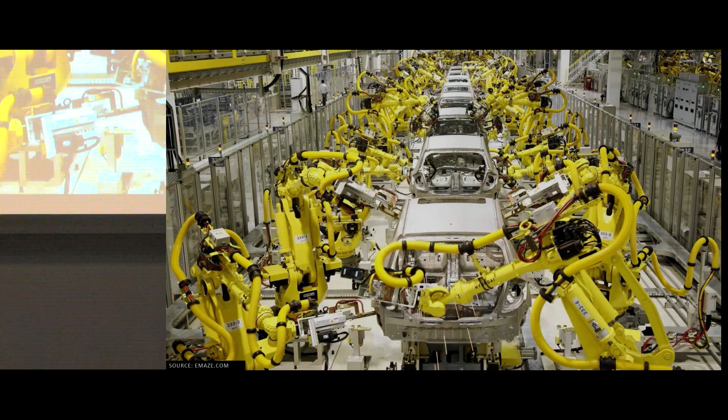So I'm excited to tell you a little bit about our thoughts, my group's thoughts, on soft robots that evolve on demand. But before I get into that, I want to start with the robot cliche. When you ask people to conjure up an image of a robot, most people think of something like this. These are rigid machines that perform a repeated task. They're very good at what they're designed to do, right? These are fast and strong and precise.

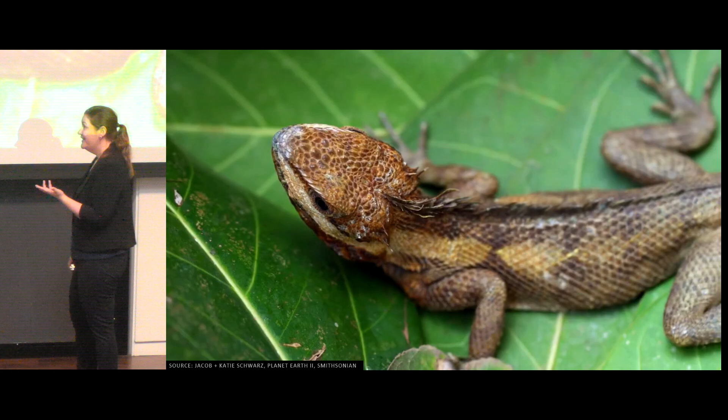But what they are not is safe for human-robot interaction. You don't see people working alongside these robots. And they're not adaptable. You don't see these robots adapting to changing tasks and environments because that's not what they've been designed to do. But when we all imagine robots for the future, I think we all imagine something more like this, like animals, like ourselves. We are incredibly adaptable, right? We readily adapt our body configuration and our behavior to different tasks and different environments.

I can easily transition from manipulation tasks to locomotion tasks. I can transition my body properties, right? I can stiffen my muscles and soften my muscles in order to perform both forceful and gentle tasks. So how do I do that? How do you do that? How do animals do that? Well, I noticed something when watching all of these videos. All of these animals look at least partially soft. So let's take a deeper dive into that observation.

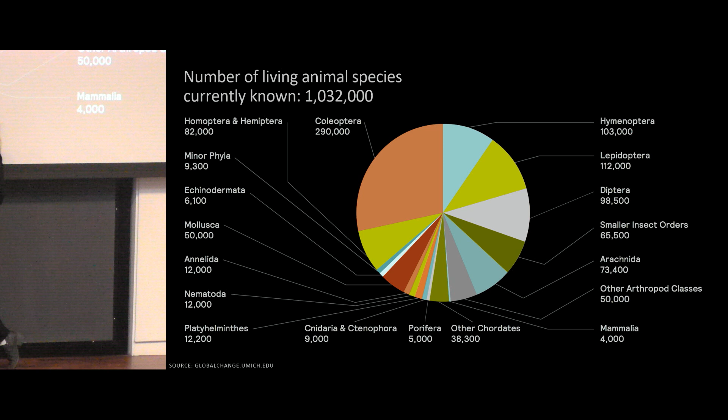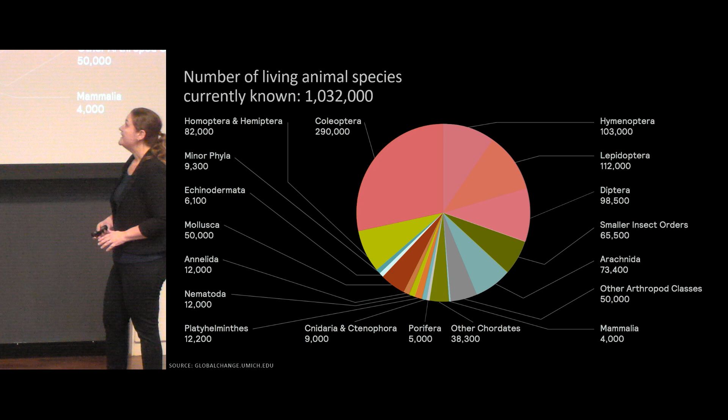Okay, here's a plot of all known animals in the world, just over 1 million at the time of this data. And just to put things into perspective, we as humans are in the mammal category, which is this tiny sliver of all known animals. And as it turns out, all known animals in the world are at least partially soft. There are no known animals that are completely rigid, which is in contrast to the way that we typically design machines and robots. And if we look at this even further, we see that over half of all known animals are completely soft, so contain no rigid elements whatsoever.

So there's certainly some things to think about when you're thinking about completely soft animals. You can think about jellyfish that live in the water or worms that live in the ground. They need to be supported by their environment. We as humans are a fairly large animal that lives on the ground. We require some rigidity, our skeletal structure, to keep us standing up. But as a case study, humans on average are only 15% bone skeletal structure and 85% soft and fluid materials.

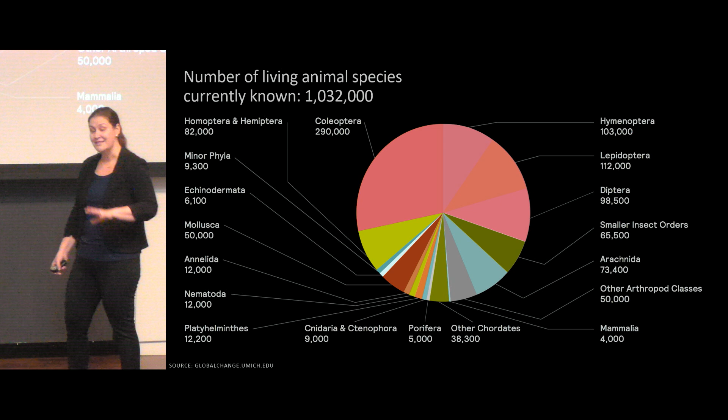So when I first heard this, I thought, wow, there has got to be something to that. Is it possible that our soft material composition plays a role in our ability to interact with and adapt to our environment? And if so, could soft robotic technologies be part of the solution to the adaptability problem for robots? So I am by no means the first or the only person to start thinking about these questions, thinking about soft robotics in this context for adaptation.

And soft robotics is a rapidly growing field that has lots of other benefits potentially outside of adaptation. Lots of pioneers have been looking at these technologies for potential adaptation, but also other potential benefits. So I want to showcase some of these benefits here. So in the first video that you can see on your left, there's a soft robot that's walking out into the street. It's a locomotion system. It gets run over by a car. It's able to continue locomoting despite this impact owing to its soft material composition that's absorbing those forces.

In the middle, you can see a soft pneumatic gripper. It's able to grasp diverse and delicate objects, owing to that soft material conforming around the objects. And on your right, you can see a wearable system, a wearable robot that could potentially augment load capacity for the wearer or increase efficiency of motions for the wearer while conforming around their body, the soft material conforming without restricting the natural mechanics of motion of the wearer.

However, all of these robots are task specific. So we talked about locomotion and manipulation and wearability. They're designed for a specific use case, and they would not perform well for any application outside of that intended use case. So the locomotion system, for example, would not perform well in a manipulation context. So the grasping robot would not perform well in a locomotion context, and so on.

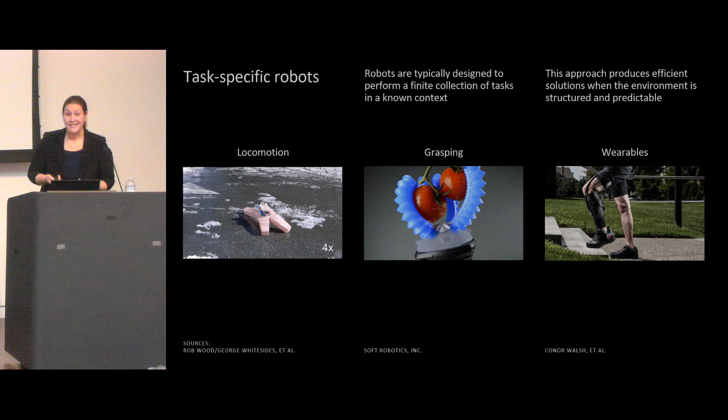And so my question is this: can we design more adaptive robots? Can we use these emerging soft robotic technologies to build robots that can adapt in their morphology and property and behavioral control policies to changing tasks and environments the way we do? So this is a central question that I've been asking for a long time. That kind of is the focal point of my research group and my research program.

And we come at this from the perspective of materials and thinking about soft robots not necessarily as mechanical assemblies, as assemblies of discrete components of sensors, actuators, structures, controllers, and putting those together, but rather as multifunctional material systems. And so one of our core competencies is we're really good at emulsifying things. We can take responsive materials and break them down into discrete components where we can then use them for different manufacturing processes. So you can imagine particle concentrations at high concentrations being used for printable slurries and at low concentrations being used for more drop-on-demand style printing.

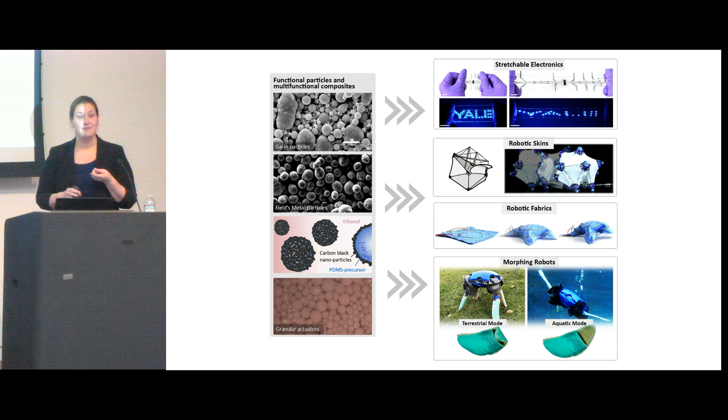Or we can also mix these functional particulates into other functional materials in order to create multifunctional composites, and then use all of these new manufacturing processes and multifunctional materials in emerging soft robot platforms with an eye towards adaptive morphology and behavioral control policy for changing tasks and environments. So here's just a few of the robot platforms that we've been thinking about recently. And I'd love to tell you about all of them, but I don't want to keep you here for so many hours. So we've now reached the adaptive part of the talk.

I have prepared modules on each of these 4 topics. And historically, I only have time to talk about 2 without keeping you too long. So I'm going to let you vote on what you would like to hear. You choose your 2 topics, and then we'll dive in. So I'll give you a little bit of a snippet of each of the topics so that you know what you're voting on, and then we'll get to a voting process.

So the stretchable electronics module is about liquid metals. It's using eutectic gallium indium and gallium indium alloys that we initially started looking at for sensors for soft robots, but then kind of inadvertently discovered a formulation that has a very suppressed strain response. And so we use this strain insensitive formulation in order to port traditional electronics and computational circuits into soft stretchable forms.

Robotic skins is one of the oldest topics on this list. It looks at planar elastic membranes with embedded actuation and sensing that we can wrap around inert deformable objects in order to turn them into robots from the surface. Robotic fabrics, again, looks at planar surfaces, but fiber-based, where we're looking to create functional fibers that serve as actuators, variable stiffness materials, and sensors, while retaining the native fiber architecture and mechanical properties of the fabric.

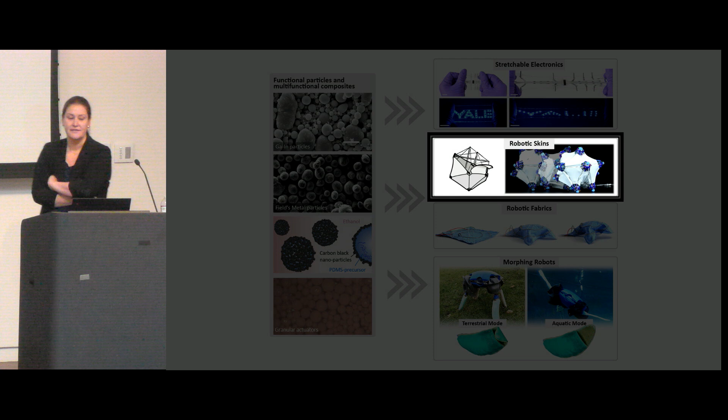And so I had an idea, and this is the idea that I pitched. Robotic skins. What if we could turn skin-like membranes into robots? If we could make these elastic planar membranes with embedded sensors and actuators and computation structures, all of the things that we need, but within this stretchable membrane that can be wrapped around inert deformable bodies and turn things into robots from the surface on the fly.

So in this case, there's a kind of simple schematic of a potential robotic skin. We have actuation layers, which are drawn as lines. Those are meant to be linear contracting actuators. We have different sensory layers that might be sensitive to strain in certain directions or pressures. And then we can put those all together, wrap them around some soft body. So in this case, it's meant to be a balloon.

So we wrap a robotic skin around a balloon, and if we wrap it so that the actuators are radially wrapped around the balloon, and then we sequentially contract those actuators, we get something that looks like peristalsis. And we could take this balloon and put it on the ground, and it might look like it's performing peristaltic locomotion.

Now we can take this robotic skin off, so we can remove it from the balloon, reorient it 90 degrees, and reattach it. Now those linear contracting actuators are along the length of the balloon rather than wrapped around radially. And so when we sequentially contract them, now they'll bend the balloon. And so you could see this kind of bending motion. You can imagine if you take this robot and put it on the ground, that you might see something that resembles inchworm style locomotion.

And so you can start to think about how you could use robotic skins and skin-based control in order to create robots on the fly that have different motions, different modalities of motion, and different types of locomotion, perhaps, for various terrains and locomotion robots. Okay, so I wrote up a proposal. It was actually the first proposal I ever wrote to NASA. They reviewed it, they said yes, and off we went. So this was one of our first projects.

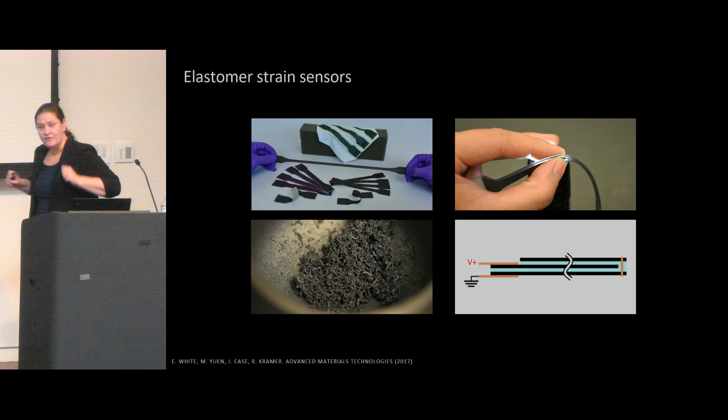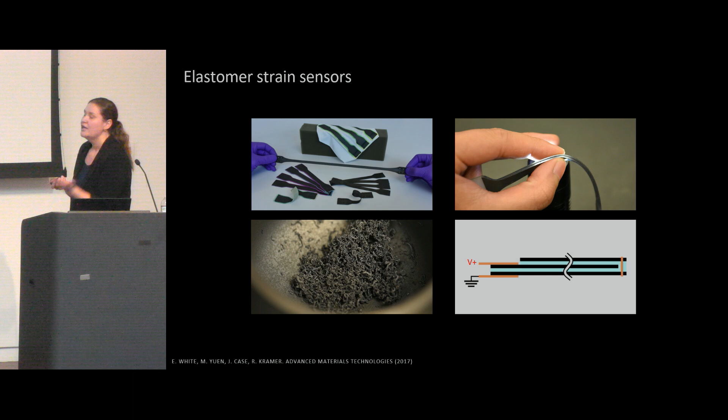And then we can take these flakes and mix it into a pre-cure polymer, and we can rod coat it, make films of it, and cut out these capacitive sensors. So you could use a 3-layer sensor. We make a 5-layer sensor. We just add another dielectric and electrode layer in order to protect the sensor from noise.

Okay, so let's look at how these sensors perform. So we have a nice linear response. This is one of the benefits of capacitive sensing and stretchable capacitive sensing. Our capacitance response to strain is typically very linear. We have an expected nonlinear mechanical response to strain. It's a fully elastomer layup, so that's highly expected.

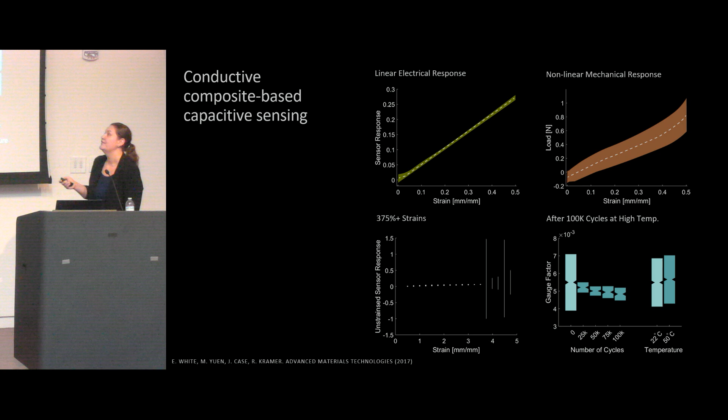Our sensors, this particular one, operates up until about 375% strain, sometimes higher. So we think it's very accommodatable to the types of soft robots and types of strains that we would be experiencing. And we also looked at drift over hundreds of thousands of cycles. So we cycled our sensors to 100% strain for 100,000 cycles, and we saw very little drift in the gauge factor, which is a measure of the sensitivity of the sensor.

And working alongside NASA, they also encouraged us to look at temperature variations, environmental variations overall. And so we did look at some slight temperature sweeps between close to room temperature and a little bit warmer, and again, saw a lot of stability in the gauge factor or the sensitivity of the sensors.

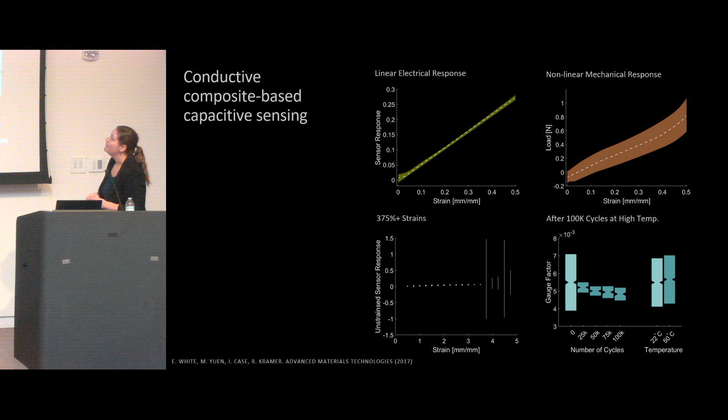So I will say before moving on that we have developed these sensors quite a bit further since this initial design. In addition to the graphite flakes, we've added in liquid metal particulates. So we've made it a multi-phase composite. And this actually evens out the thermal conductivity throughout the electrode. The electrical conductivity and the percolation is much more uniform throughout the electrode. And so this has increased our linearity of response, especially at very high strains, quite a bit. So that's just some more recent work that we've been doing with this.

Okay, so with confidence in our sensors, we can now put them together with actuators and start to realize the robotic skin concept. So here are just a few of the initial prototypes that we made. So it's really important to think about robotic skins not as a specific embodiment. So it's not a specific substrate material, a specific layout of components, specific actuator choice or sensor choice. It is an elastic membrane with embedded actuators and sensors.

Stand by the podium, sorry, I feel like I'm wandering.

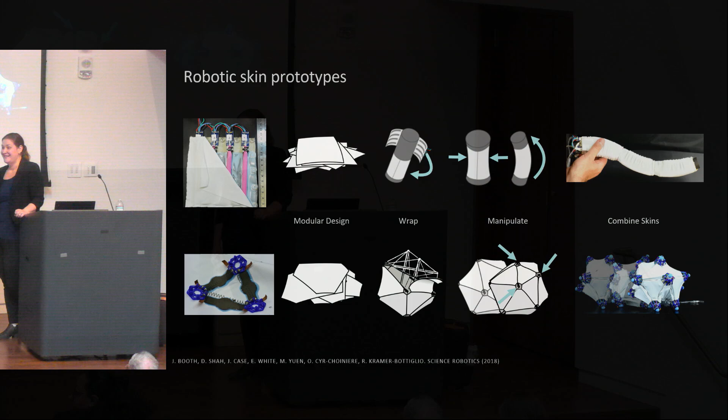Other questions? Great questions, guys.

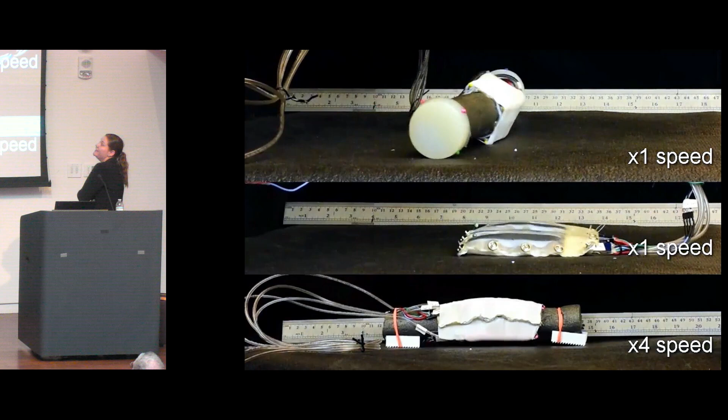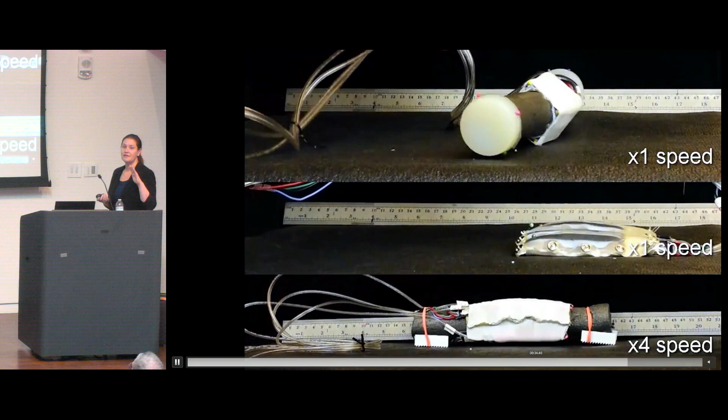So we take the robotic skins off, and then we can put them on 3 other bodies in order to achieve a different task performance, locomotion performance. So here, let me see if I can go back a little bit and replay this part. So one robotic skin is wrapped around this cylinder foam. Remember, these are planar configuration of components. So we are confined to single curvature bodies.

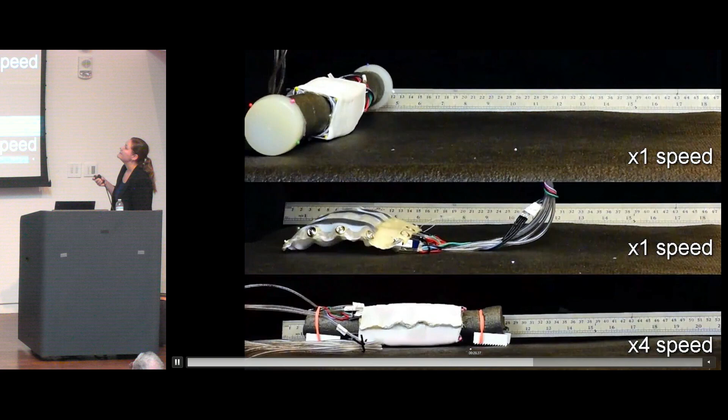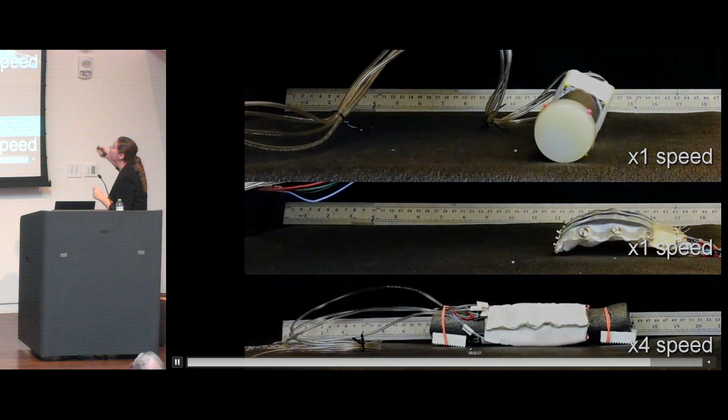And let's see. Yes, so in this case, we have these weighted end caps. So those of you who work with elastomers might remember we mix in cups. You pour part A and part B into a cup, and then you use it, and you have this stuff at the bottom that just kind of cures there. And we just took those out of the cups and pinned them on to the ends, and we made these weighted end caps for this grab and pull style of locomotion. Move it forward just a tiny bit more.

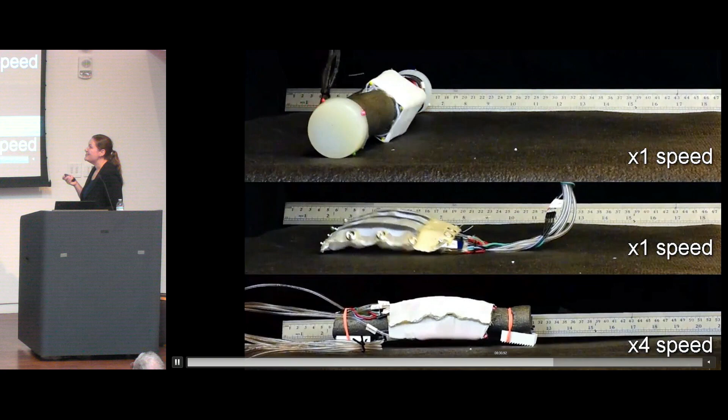And then in the middle, we have a bodiless one. So this is not attached to a separate soft body. This is a skin just locomoting on its own, but I like your idea of attaching multiple skins together. We will definitely look at that in the future. And then here we have a more inchworm style of locomotion. We've just used rubber bands in order to, sorry.

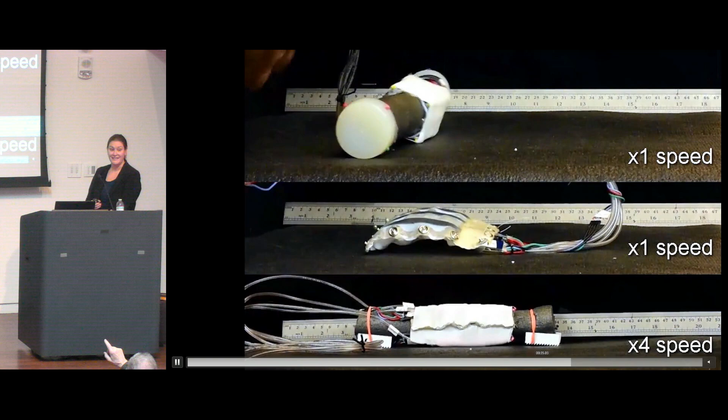I had a question about the middle one. Yes. How does it know to go right? Is it guided by the wires? Because when it contracts and extends, it doesn't know whether it should go left or right. You know what I mean? Yes. So the wires are doing something.

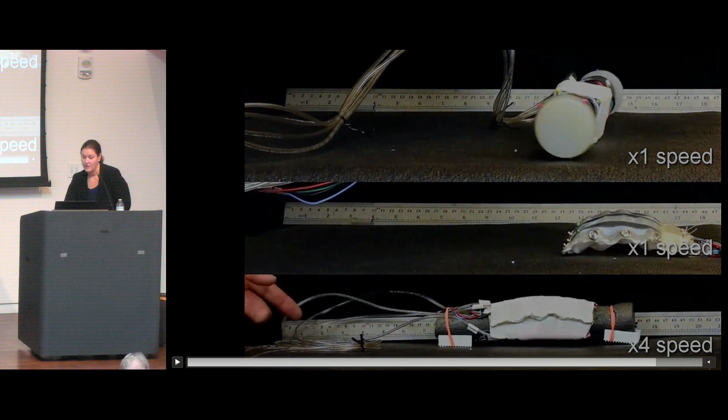You're right. I think, so in many cases with tethered systems, the locomotion function is heavily affected by the wires. And you're right, there's a lot of tethering going on here. We have tubing for the pneumatics. We have wiring in order to deliver power to our transducing circuits, our capacitive circuits. So there's a lot of tethering going on here, and power is off board. So there certainly can be some influence from the wiring. We haven't untethered these systems yet.

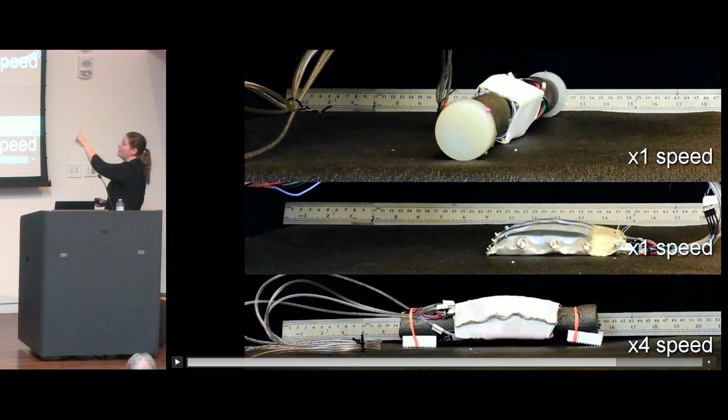I will say, I don't have a video of this particular one, but we did a demonstration where we put a light sensor on a robot that looks most similar to this one. So this one we just have the rubber bands and the laser cut. It's just a piece of plastic that's been cut to have biased feet so that it will move in a biased direction during inchworming.

And we attached the light sensor just to the front of it and then used a flashlight. We just told it to very simply follow the light. And then we moved a flashlight around and it followed the light. And it was also tethered, but it was able to make fairly, I'll call them agile turns and follow the light pretty well. So we know that there is some control that is beyond the tether. Did that answer your question?

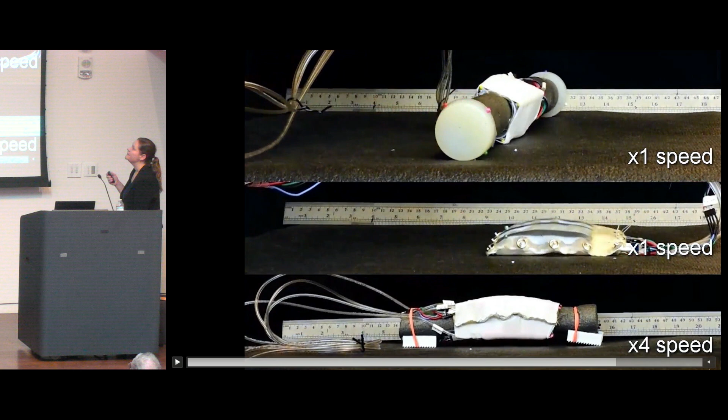Okay, great. So the final thing I want to point out on this slide is that all of these demonstrations are intentionally very hacky, right? So like I said, we just took out the pieces of elastomer that had been cured in the bottoms of cups and used pins to put them on, and we use rubber bands here. And that is all in line with the robotic skin concept.

We wanted to deliver something to NASA that they would be able to just grab whatever they had available, in situ material, crumpled pieces of paper, rubber bands on board, and that people would be able to build robots for different types of locomotion or different types of manipulation performances or grippers, just using whatever they had. So that's why we very intentionally made these out of readily available materials.

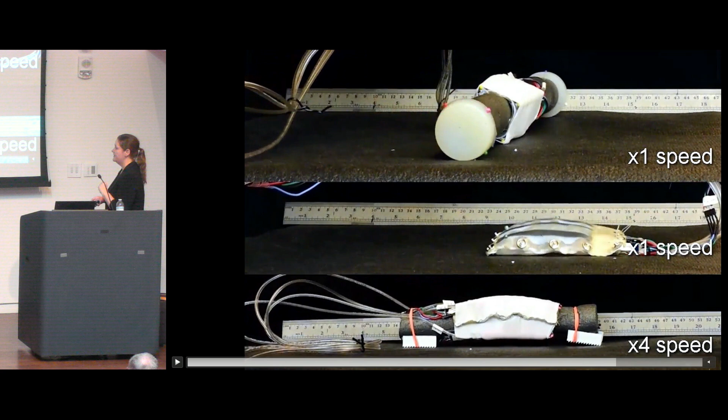Okay, so now we can return to our 3-segment continuum arm and turn it into something that looks a little bit more like a gripper. So in this case, we have two plastic plates, and we've taken one of our robotic skins, and we simply contract it between the plates so that it grabs an object, moves it to a desired location. Here we took that one gripper off and added another gripper.

So it's the same 3-segment continuum arm here, but here we have an active finger and a passive finger, and this is just made out of cardboard. And again, we just grab an object, move it to a desired location. So this shows how we can use the same exact skins across a manipulation platform, a gripping platform, and a locomotion platform, or several locomotion platforms. Okay, and now we can look at our triangular skins. So I talked about this a little bit before.

Yeah. Did you, this might go to Christine's point, did you ever try wrapping it in a kind of angular way so you could cause it to twist? Yes. Oh, we actually just published a paper on this. I had a student that looked at angles of actuators and looking at torsion. The modeling became slightly more complicated.

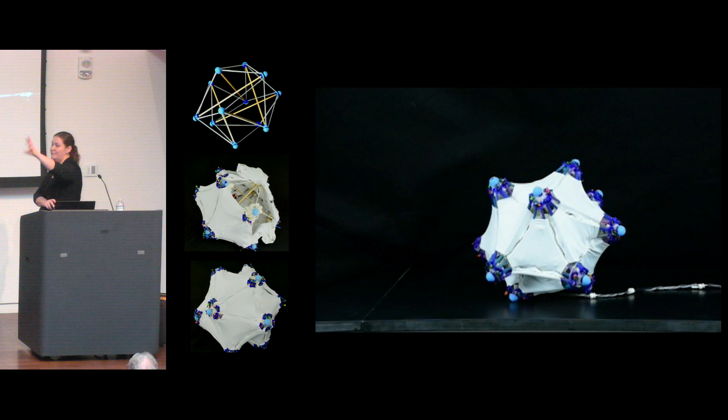We had to relax some assumptions in our initial models about constant curvature. Yeah, exactly. In order to couple constant curvature assumptions to torsion. But yes, we've started looking into it. It is possible. It's a little bit more challenging for us to do predictive modeling on placement of the end effector, but efficacious nonetheless. Great question.

All right, so here are the triangular skins with the triangulation of components. We decided to put them on a 6-bar tensegrity. This was largely influenced by our collaboration with NASA. So we were working alongside them on this project, having tight collaborations with NASA Ames in particular. And at the time, they were really active in a project called SuperBallBot. Maybe some of you have heard of it. It was a robotic 6-bar tensegrity.

So they had a structure that looked like this, except it was very large. I'll say this tensegrity that you're seeing in this video is desktop scale. It's about this big. SuperBallBot, the one they built at NASA, is about my height. It is massive. And it is fully robotic. So they change the lengths between the cables that suspend these rods in order to create punctuated locomotion. So we were very inspired by them and working alongside them.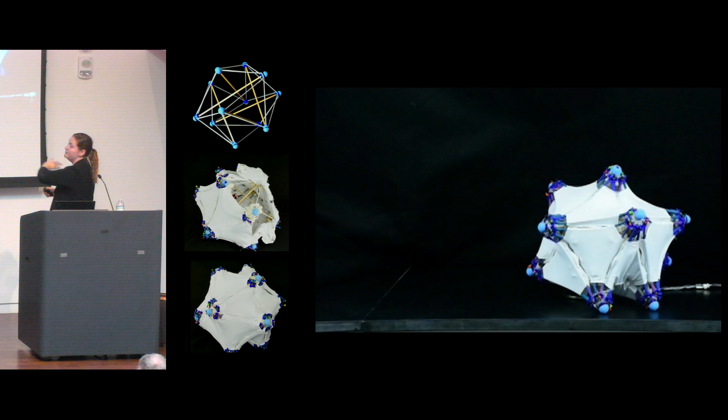We took a fully passive 6-bar tensegrity. So there's nothing robotic about this one. And we took 20 of our robotic skins, patterned them around the surface, and then actuated it, achieving the same kind of punctuated rolling locomotion, but actuated entirely from the surface. All right, so then we can take these skins off and use them in a totally different context.

So here we've placed them on the back of one of my former postdocs. This is Joran Booth, and he's doing a great job here. So we've just used double-sided tape in order to attach the robotic skins to his back. And we've aligned the sensors along his spine, and we've programmed them so that once they stretch beyond a threshold, as he's slouching, the sensors will stretch. Yes, question. This is very interesting. I have a question about the tensegrity.

When you change the length of the cables, how do you maintain stability? Can you make some comments about the stability of the system? Yeah, so from a robotic tensegrity standpoint, there's a really large amount of literature on robotic tensegrities, and I don't want to try to represent all of it. People have used really different technologies towards this.

But I would say the most common approach, this is the most common morphology, a 6-bar tensegrity. We're actually working on a 3-bar tensegrity, but it has a different morphology than this. I think the symmetry of the 6-bar makes it really appealing. And so most of these are actuated through a winch and cable mechanism. They're usually larger in order to actually accommodate that hardware.

And so tensegrity is tensile integrity. Sorry if I wasn't clear about that initially. It means that there are rods that are suspended away from, so none of the rods are in contact with one another. They're suspended away from one another and in equilibrium via cables in tension. And so those cables are what's connected to the winch and cable mechanism.

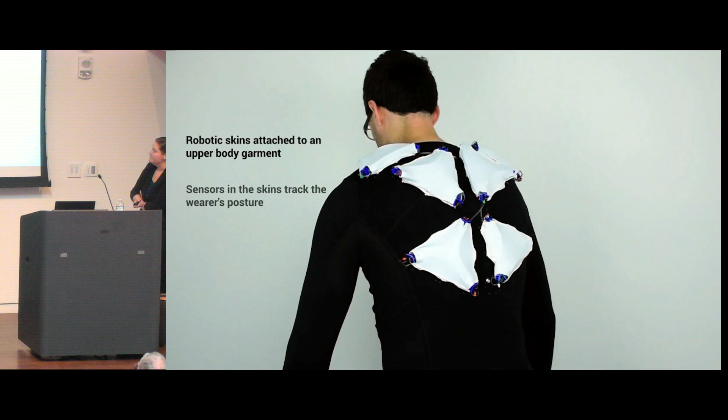Wonderful. Okay, so let's look at wearables again. All right, so here, Dr. Booth has our robotic skins attached to his back with double-sided tape. We've programmed the sensors to communicate with the actuators. So once they stretch beyond a threshold, so he slouches, it stretches the sensors. The sensors go beyond some threshold that we've set, and you'll see in the data that's about to pop up over here. There it is.

Okay, so there's our sensor data, and whenever he slouches, it goes into this stretch position, and that communicates to the actuators that they should start pulsing. So the actuators, you can see they pulse to communicate with Joran that he should sit back up. So I'm commonly asked whether these actuators are actually corrective of the posture, and they are not.

But I will say, if you come to my lab, please ask for this demo. It kind of feels like a massage. I think it's very pleasant. Might actually encourage slouching a little bit, but I don't know. Come and try it and let us know. Great.

Okay. So hopefully I've been able to convey to you this kind of vision that we have of modular soft robotic skins that we can have in different layouts and they can accommodate different curvatures of bodies, but we can mix and match them and apply them to different soft-bodied materials in order to create robots on the fly. So we can apply them to these long tubes of foam and different types of gripping mechanisms in order to create manipulation platforms.

This is the one I didn't show you a video of, but you can see the light sensor that we put on the front of it. That's the image of the light sensor. And so we can control it a little bit. We can put them on things like these 6-bar tensegrities to create rolling locomotion robots, and then take those exact same skins off and put them on a person, create a wearable system. And so the whole idea is to be able to use and reuse the robotic skins to be able to complete different tasks.

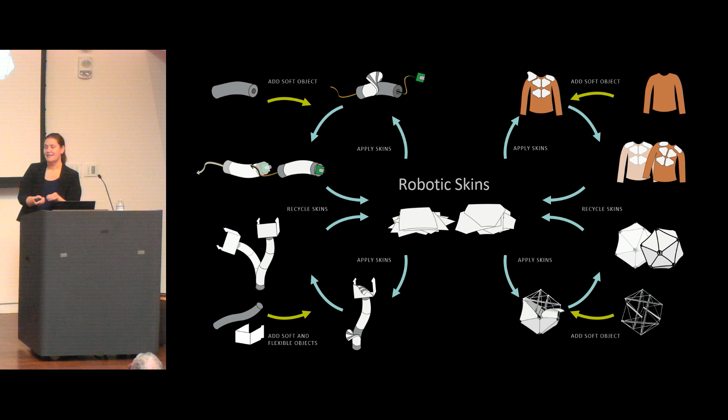So moving on, as we got to this point in the work, one of the things that we struggled with was the human handler part of it. So all of the videos that you saw require a person to actually come in and position the skin, attach the skin, remove the skin, put it on something else. So there's definitely a person in the loop here that's making a lot of decisions and doing the design. And we were thinking about autonomy in terms of variable morphology and variable task performance without a human handler.

So I had this really fantastic phone call with Josh Bongard. He's at UVM. This was years ago, where we were talking about robotic skins. And he had this idea to wrap them around plastically deformable materials. He said, you can wrap them around clay. Can we use robotic skins wrapped around clay and sculpt materials from the surface? I said, wow, that's a great idea. And so we started jumping into that a little bit. So this overall concept of wrapping robotic skins around, say, a sphere of clay, any plastically deformable or clay-like material that can be molded from the surface, applying surface strains and pressures.

And kind of just like a sculptor would take a block of clay or a ball of clay, be able to apply surface strains entirely from the surface and mold it into any morphology. And we wondered, can we do that with robotic skins? You can imagine robotic skins molding the underlying body into something that might be rolling locomotion and then elongate into something more snake-like, cylindrical-like, that can slither, or inchworm, or undulate, and then maybe even grow appendages into something that looks like a quadruped. It can navigate maybe sandier surfaces.

So we did a little bit of preliminary work toward this idea. This was one of our only instantiations that also used layered skins. That was a question from earlier: can we layer the skins on top of one another? So in this particular demonstration, we have a clay-like material. This is actually Model Magic. Maybe some of you have used it. It's not a technical clay, but it is clay-like in that it's a moldable material. And it's the white center that you see. So the white center is this Model Magic cylinder, and we've wrapped it in 2 robotic skins.

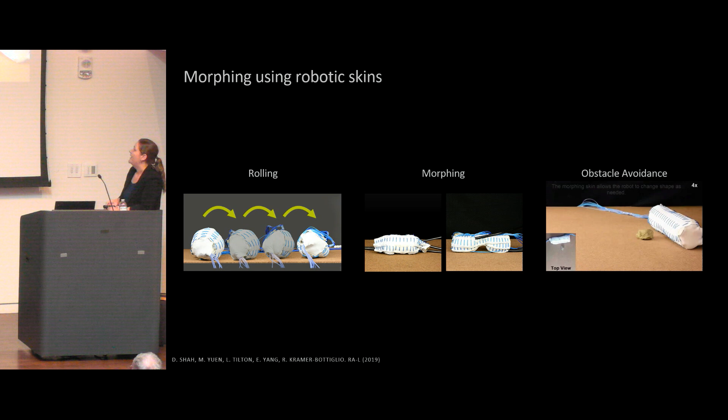So this is a very low level demonstration, but to me it shows potential. We're very interested in using this potential of robotic skins wrapped around clay-like materials to adapt the morphology using these other approaches that would be complementary to traditional path planning and gait transitions.

Okay, and then as a final thought in this part of the talk, still working alongside NASA, this is an active funded project that we're working on right now. We thought, okay, well, if we're gonna be using clay inside the robot anyway, why not use in situ material? We're gonna go to extraterrestrial environments where we know there are clay and sand deposits. Maybe we can use those things. We don't have to transport them. Again, reducing weight and volume during transport, use what's there. So we could take these robotic skins and deploy them as kind of parachutes that deploy very safely into the environment, and they can be transported flat, really low volume, really lightweight. And then once they get there, potentially stiffen their leading edges.

And I imagine these robotic skins being able to burrow into the ground and scoop up their own bodies, using in situ materials to create their own bodies, envelope around that material, and then perform tasks just as we saw in the previous slide. So this is something that we're working on right now. We're doing a lot of work towards variable stiffness materials in these leading edges and also studying burrowing, which is a new project for us. We're learning a lot about penetration forces through different granular media. And we're having a lot of fun with this.

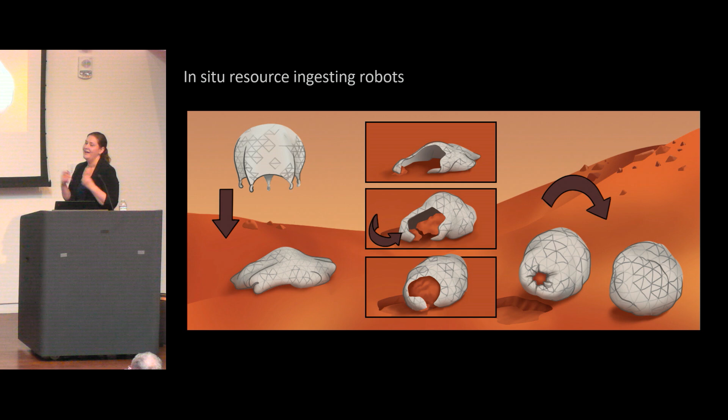Okay, so with that, I will move on to your second voted topic, morphing robots. So this is a project that we started working on with ONR about 7-8 years ago. And it again started with a very specific challenge. ONR was interested in amphibious locomotion, efficient multi-environment locomotion. And so we started thinking about amphibious robots and how they currently do this. And what we learned is that amphibious robots typically fall into one of two categories. So usually you have an amphibious robot with a dominant propulsion system, one that is really efficacious in one environment.

So say it has a propulsion system that's largely optimized for land locomotion, and then can operate in water, but it's less efficient in the water environment. So it can be amphibious, but it has a dominant environment where it's more efficient in one environment.

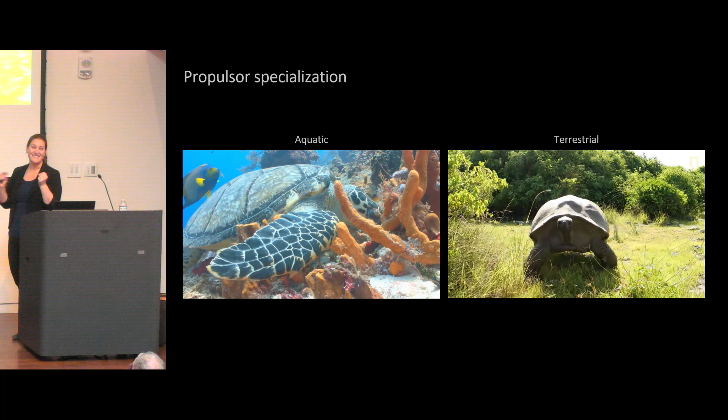Or the second category is amphibious robots with two dedicated propulsion systems, one for water, one for land, and then the robot will retract and deploy whatever propulsion system it needs based on the environment that it's in. But this means that it's always carrying around a propulsion system payload. It's always carrying around one system that it's not using, and we thought that that might negatively impact the energetics of locomotion in each environment.

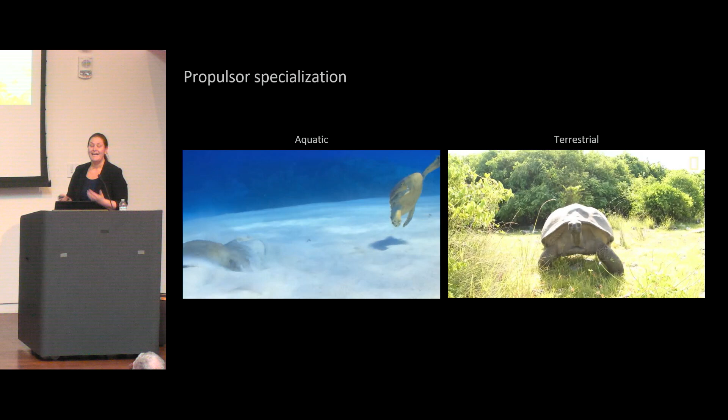And so we had this idea to create a unified propulsion system, a single propulsion system that leverages soft robotic technologies to morph the propulsor to be specialized in each environment. But this way it's not carrying around a separate propulsion system, it's using the same one, and it should be efficient in both environments. And so as I've been explaining this, you've been watching these two videos, so it will come as no surprise to you that we were very inspired by these two species.

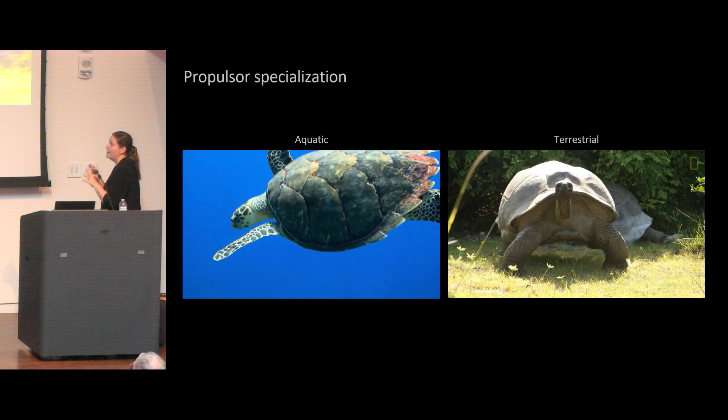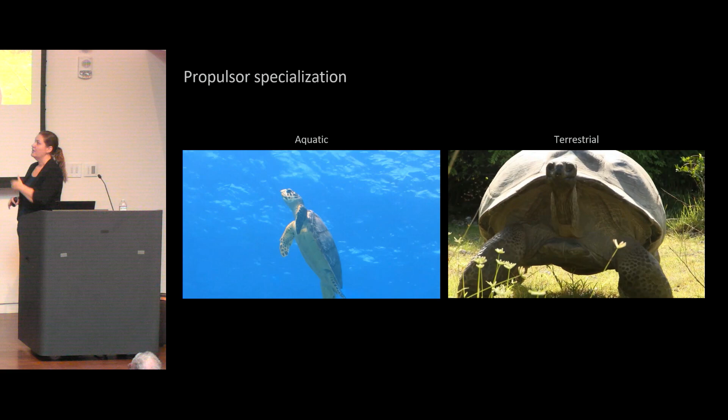We surveyed land locomotors and water locomotors, and we identified sea turtles and land tortoises because they are morphologically very similar, right? Both are quadrupeds, both have a central shell, hull, carapace, and they differ primarily in their limbs. Sea turtles have these flattened, elongated, flexible flippers that are very specialized for locomotion in water. Land tortoises have rounded, load-bearing legs that are very specialized for walking on land.

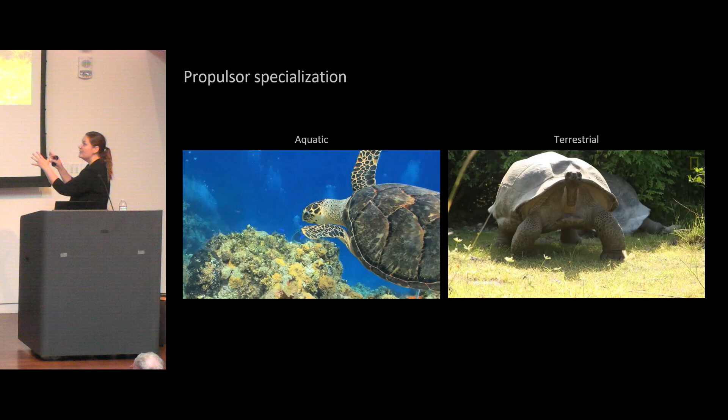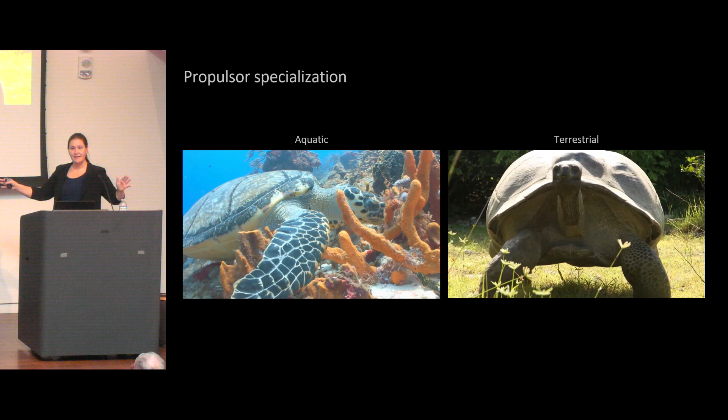And with this inspiration, we thought, okay, we can build a single robot that has an immutable shell at the center, more traditional robot center, and really only morphs its propulsors, its limbs, between flippers and legs in order to achieve this efficient multi-environment locomotion. So this is exactly what we did. We created this robot that we call the amphibious robotic turtle, or ART for short. It is sea turtle and land tortoise inspired, and it has these morphing limbs.

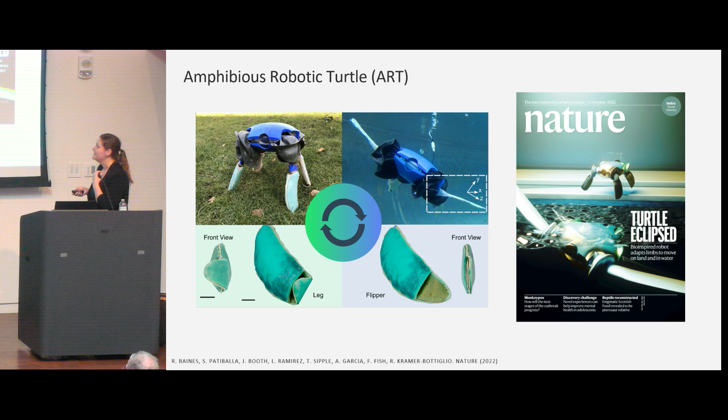So the center of the robot, this 3D printed shell, which I'll talk about more in a moment, has all of the traditional robotic components housed in there and protected in there. And we have soft robotic limbs, which are variable stiffness materials and soft actuators coupled along the length of the limb that transition between flipper and leg configurations. So I'll go into a bit more detail about how all of these different components work.

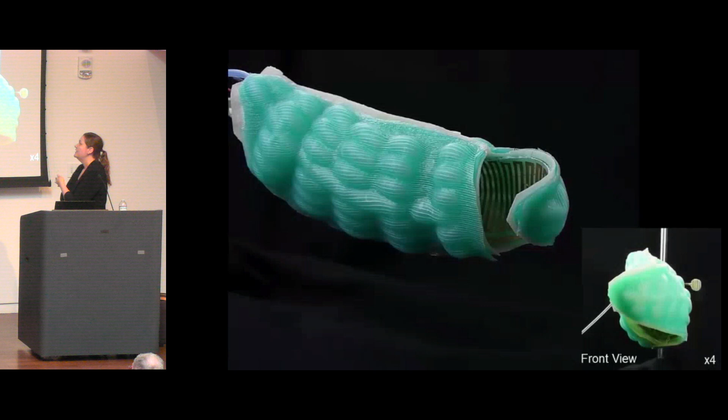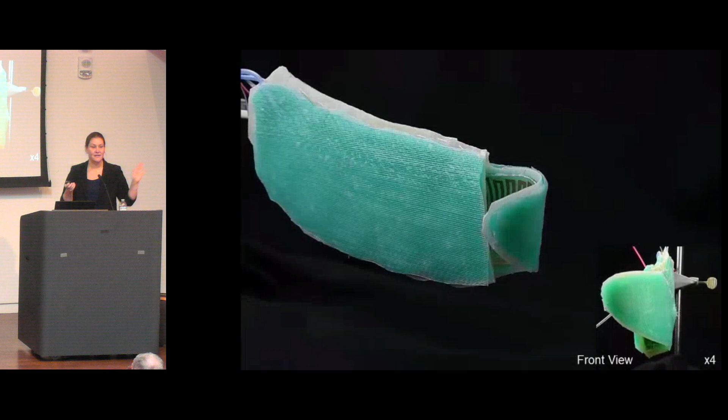So here's our first iteration of the morphing limb. It's initially in flipper configuration. That's how we manufacture it. It's made of pneumatic actuators in elastomer. So there's 3 pneumatic actuators on this limb. There's one on the outside here, one on the back that you can't quite see, and then one in the tip that folds under. So that's the tip of the flipper. And as it folds under, that creates the foot of the leg. So that's what comes into contact with the ground in leg shape.

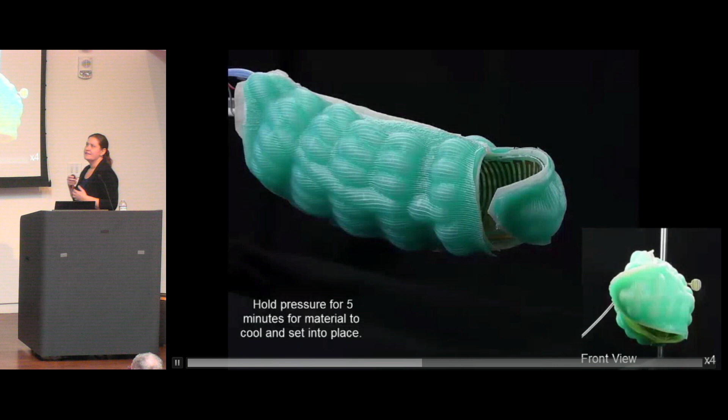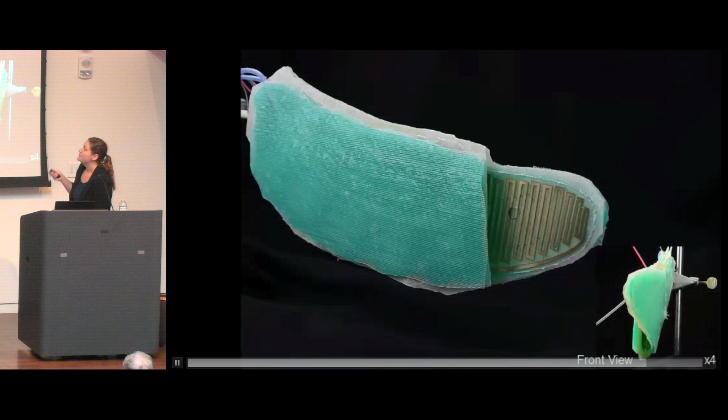And then we use a thermoset epoxy as our variable stiffness material. That's the clear material that you can see kind of going into the limb here. It's a thermoset epoxy. It has a glass transition temperature, and it decreases by about an order of magnitude in stiffness when we warm it above that glass transition temperature. And the way we warm it is using this co-located heater. So you can see a laser cut copper heater that's embedded within that thermoset epoxy.

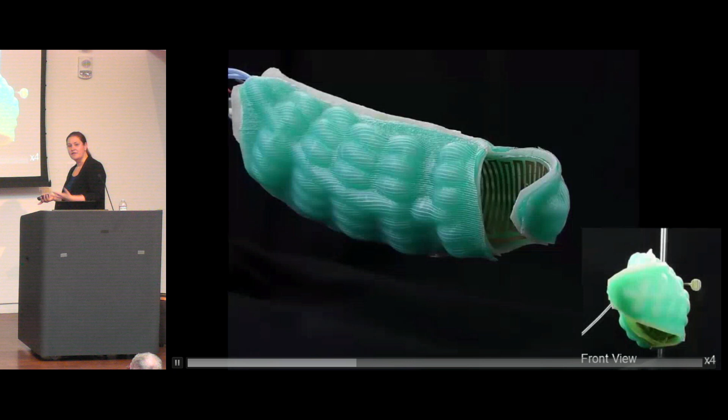And so we simply apply current, joule heat the heater, it warms the epoxy, softens the limb, and then we can use our actuators in order to move it into the leg shape. We cool the whole system down so it holds the leg shape passively. And then when we want to go back to flipper, we simply apply current again, warm the limb, soften it, and it can use its stored elastic energy in order to return into its neutral flipper configuration.

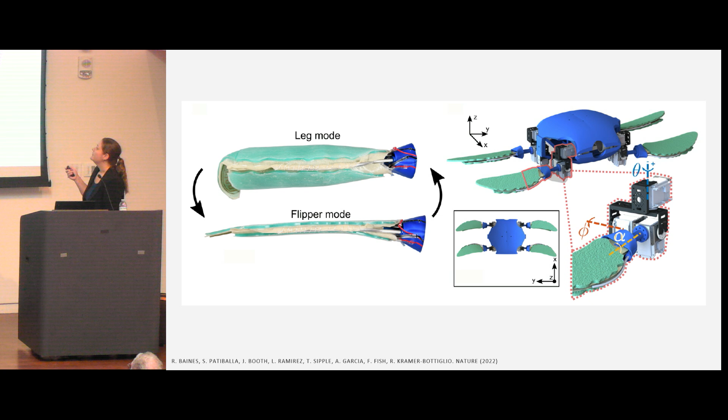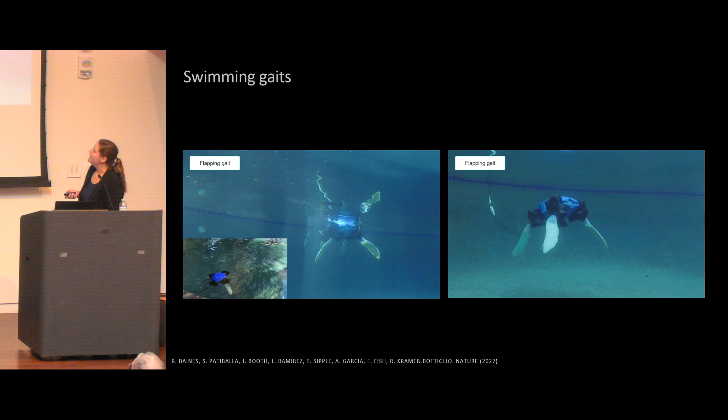And then the way that we attach these flippers or legs, limbs to the robot, you can see that here. We have a 3D printed shell in the middle. We have all of our control systems, power supply, everything we need housed in the center of the robot. And then each joint is made of 3 Dynamixels, 3 servo motors that create a 3 degree of freedom joint at each shoulder. All right, so let's check out the robot in some respective environments. So here we have the robot swimming in a backyard pool.

This is actually my dean's backyard pool. Yeah, so we were collecting this data in the summer of 2020, which we all remember. So we lost access to the Yale pool. The Yale pool was closed, and we were having a really hard time gaining access to any kind of public pools that we could do testing in. We were doing some testing over the summer at a pool club locally, but then it closed for the season.

And then you can see in some of these videos that there's leaves floating. Yeah, there you go. You can see the leaves floating at the top of the pool here. So we were pretty desperate to continue testing, and our dean very kindly kept his pool open late in the season, just to accommodate our testing. But it tells you a little bit about how cold it was, seeing those leaves floating up there.

Nonetheless, we are swimming. So here the robot has its limbs in flipper state. It's using flapping gaits. These are lift-based propulsion gaits. We also did some paddling gaits, but I don't show them here because they don't look quite as beautiful. The robot is doing some basic maneuvers. It's swimming forward, it's diving, it's surfacing.

A couple things to note about the gaits. These are real sea turtle inspired gaits. They're hand programmed by our biologist collaborator, Frank Fish at West Chester University. So he came out and actually took a flipper and would move it into the correct gait. And then we would smooth that data and kinematically copy it to the other side. Those are the gaits that you see here. So they're non-optimized gaits.

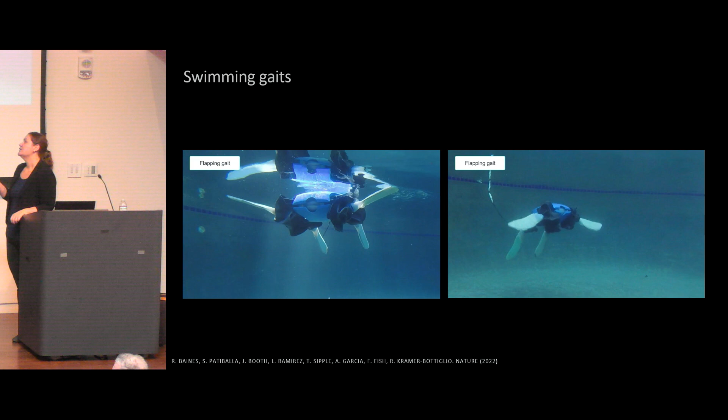No, so these are really just trailing behind. We're not doing anything with the hind flippers in these videos. Now, with our newer iteration of the robot, we're doing gait optimization that utilizes the hind flippers, but in these videos, we're not doing any kind of rudder control with them.

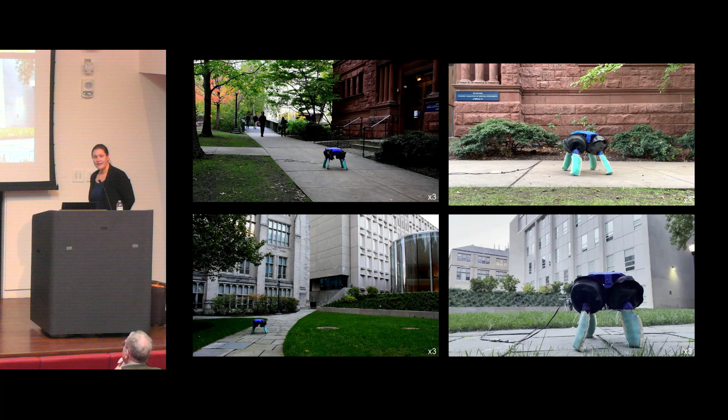Yeah. All right, so then we can pull the robot out of the water and morph the limbs from flipper mode into leg mode and take a walk around Yale's campus. So here, the robot is walking right outside of my lab and other places on campus. This is using an upright creeping gait. So this is a quasi-static gait. It's very stable. It means that 3 legs are always in contact with the ground to form a stable tripod while one leg sweeps out to take a step.

One thing to note, again, these are not optimized gaits, they're hand-designed gaits, and the robot's always walking on these rigid surfaces. So you see it's walking on sidewalk and on stone here. This upright creeping gait was very unstable on less stable terrains. So it wasn't stable on grass, for example, or sand, which you can imagine would be a problem if we're trying to transition from land to water environments.

So we did program in a third gait. This is our crawling gait inspired by the way female sea turtles actually crawl down the beach after they've nested. They're getting back into the water. So here, ART has its belly in contact with the ground. We're still in leg mode.

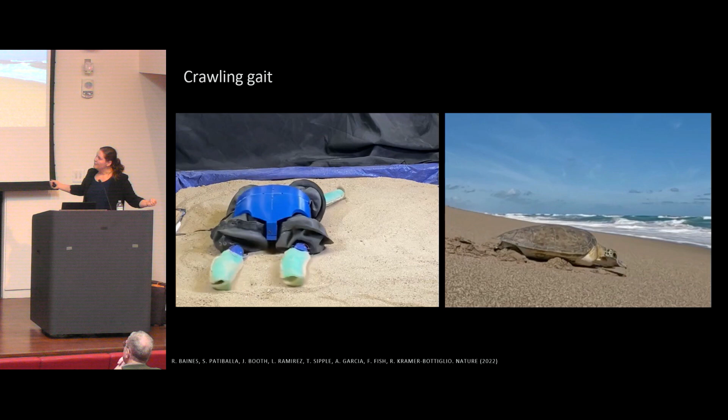Our thermoset epoxy is fairly brittle. And so if we put too much force on it, especially in flipper mode, we get cracking. So we left it in leg mode here so we can withstand the forces a little bit better as our robot does an ever so slight push-up and pulls its body forward. And something to note about this video is that I actually took this video myself.

So I was really fortunate to do a project at Florida Atlantic University for a while studying the amphibious behaviors of real sea turtles. And so I got to observe many sea turtles that were coming up onto the beach and released on the beach, and well, it was wonderful sitting on the beach watching these beautiful animals move. Very validating of my life choices.

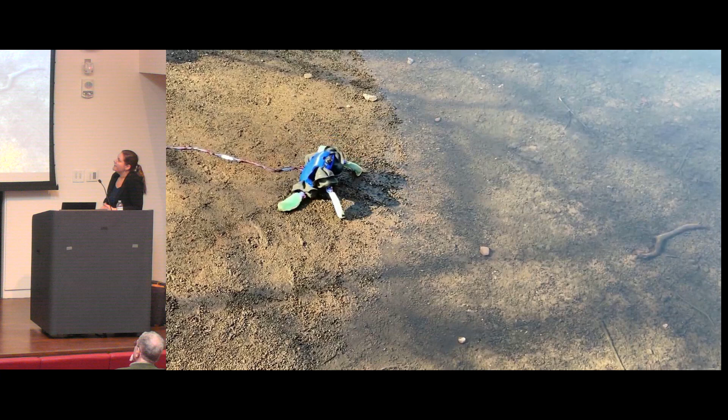Okay, so let's put it all together. So here we're going to complete an amphibious transition. The first thing that you saw is that ART sits down. So I told you the upright creeping gait, our walking gait, is not stable on granular surfaces. So we couldn't execute it in this environment. So we put the robot there, it sits down, and we go immediately into crawling mode. And so here the robot is going to crawl into the water.

And then in a few moments, once it gets sufficiently deep in the water, you'll see the screen blank out and it will say, morphing from leg mode to flipper mode. And then it will come back and you'll be able to see the robot kind of swimming around the shallows at this ocean inlet. So this is an ocean inlet near Yale's campus. It is seawater, but you can see there's almost no wave energy. It's a really gentle transition site for testing. Very, very low currents as well.

And you can also see that the robot is tethered. So off the screen here, we do have a generator powering the system. And we're also using the tether for communication. We have a laptop off screen and we're communicating the gaits and transitions through teleoperation.

Okay, so the reason that the screen blanked out, the reason you didn't actually see the morphing behavior, is because we were doing this testing in the winter again. I don't know why we're always doing field testing when it's cold outside, but when the video pans out sometimes, you can see that there's no greenery in the background. Everything looks pretty dormant. We were doing this testing in March of 2021, and it was very, very cold. It was cold air, cold water.

And then you might also remember that our morphing is thermally dependent, right? We require softening based on heating our limb past the glass transition temperature of our thermoset epoxy. And that was very difficult to do in this cold, cold water. So we actually took the robot out of the water, morphed in air, and then put it back in the water.

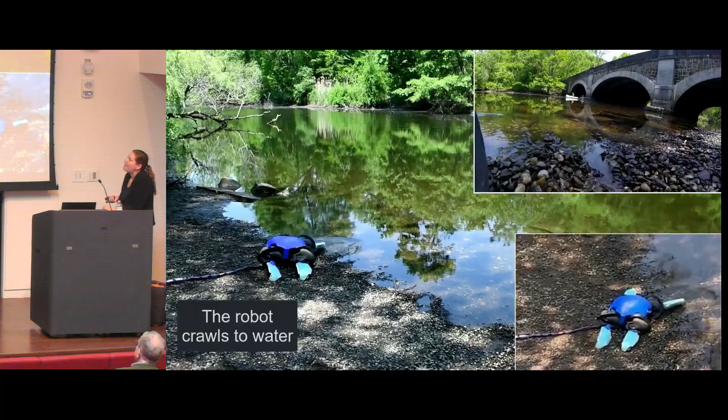So the first thing we did is we just went back when it was warmer. So this is the exact same spot. You saw the robot just sit down. It's crawling into the water. The greenery in the trees. There was a canoe that went by. It was really pleasant doing this testing.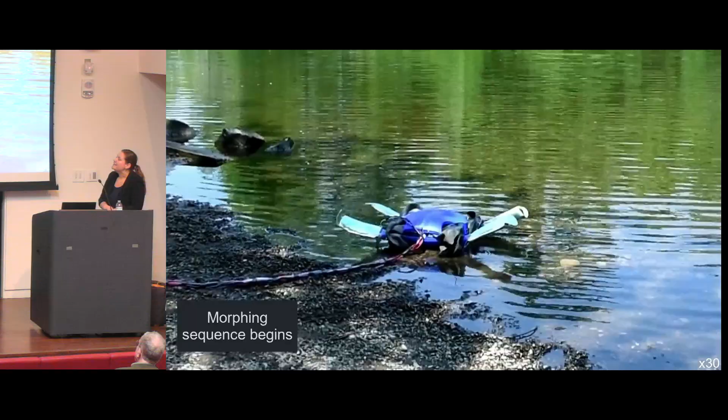We still found, as you can imagine, the water doesn't warm so quickly. Even in the summer, the water is pretty cold. And so we still found the cost of morphing, the cost of changing and heating our system underwater, was so high. And so we developed this strategy that you just saw here, where we partially get into the water and then we lift the limbs and morph them in air.

And now, because the robot is partially submerged, there are lesser forces as we continue crawling into the water and swimming away. But this still wasn't a perfect solution to our problem. So I will tell you about how we solved this more long-term. But first, I just want to address the cost of transport and the energetics of multi-environment locomotion.

Sorry, are we running low on time? I see, okay. Sorry. Okay, I will try to speed through the rest of this.

So this is cost of transport versus body mass. Here you can see our amphibious robotic turtle in crawling mode, walking mode, swimming mode. And then you can see a bunch of other robots on here.

Cost of transport is not the most commonly reported metric in the literature, so I can't say that this is the most comprehensive comparison to benchmarks, but it is everything that we could find. And really, we wanted to show not that we had a lowered cost of transport in either environment. We weren't optimizing cost of transport in water or on land, but we wanted to show that using our morphing propulsor, we could get a comparable cost of transport to robots that have been designed only for water or only for land. And I think that we achieved that here using our morphing propulsion system.

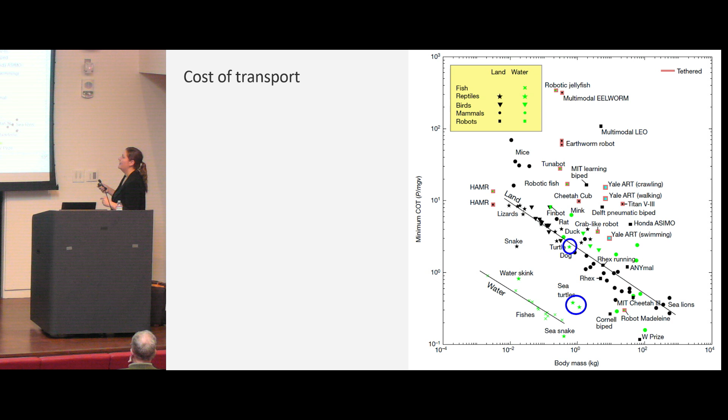But this is also only reporting terrestrial cost of transport and aquatic cost of transport, and does not account for the cost of morphing. So we don't see the energetic cost of getting between those things. And multi-environment cost of transport is something that we're trying to formalize and report right now. And then of course, I'll point out real sea turtles and pond turtles, land turtles, which have a better cost of transport, giving us something to always strive for.

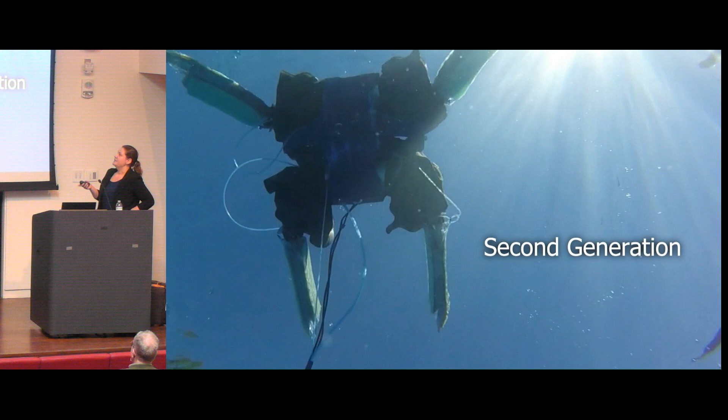So, okay, let me try to fly through just a couple. I'll skip through some slides, but I want to just show you quickly how we address this longer term issue of decoupling from the environmental temperature. So we traded out our variable stiffness material. We pulled out the variable stiffness epoxy, and we instead put in layer jamming systems. So that's the additional tubing that you can see. This is our jamming amphibious robotic turtle. We call it JART for short.

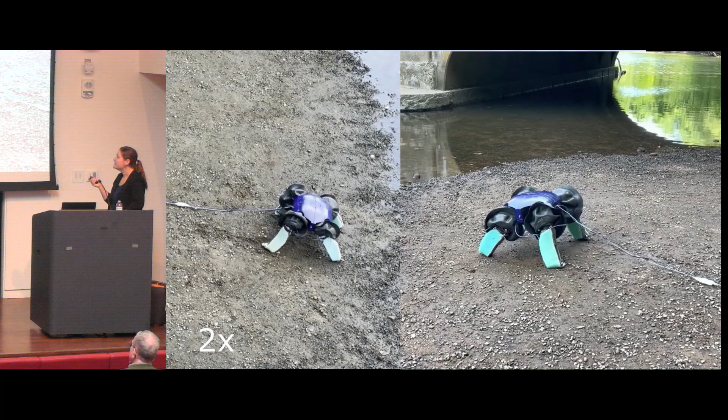It does have a redesigned limb. You can see that the limbs are a little bit thicker. We lost some of the hydrodynamic profile, so the swimming gaits are only paddling gaits at this point and not lift-based propulsion strategies. But we do gain a lot in terms of terrestrial locomotion here. We have 2 layer jamming pouches that use a topologically patterned kirigami approach in order to get favorable bending stiffnesses that accommodate our limb strategy specifically.

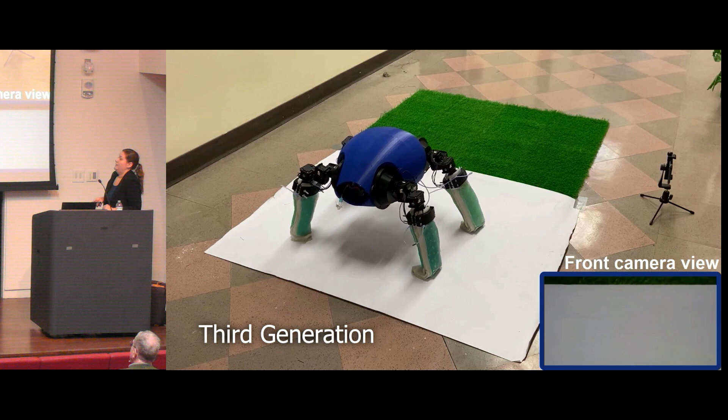And this is our newest iteration. So that was generation 2, which is currently in revision, so hopefully going to appear in the literature soon. And this is our generation 3. It's completely untethered, so we have everything on board. There's no tether anymore. All power and communication is on board. We are communicating wirelessly via Wi-Fi.

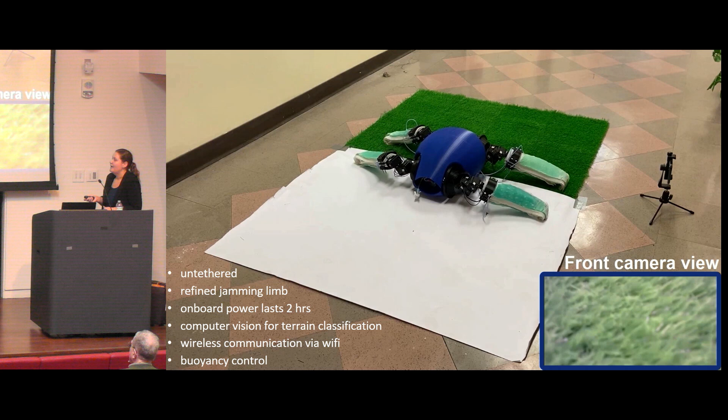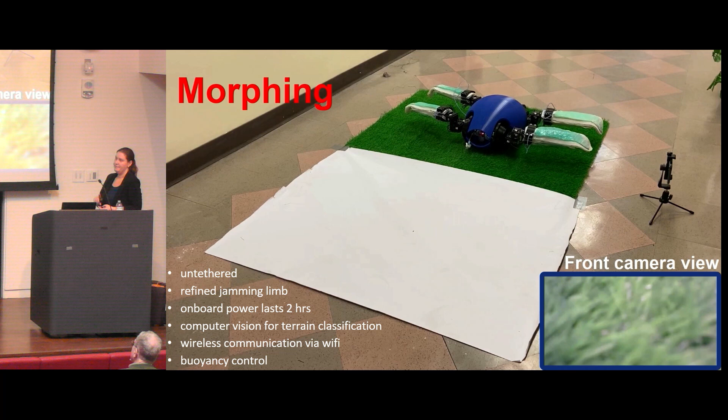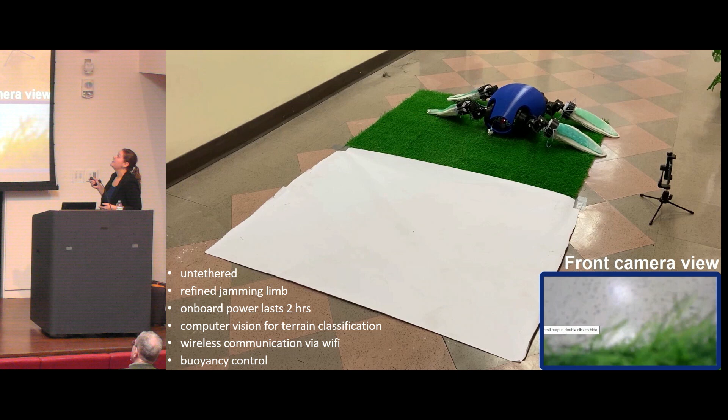We've also got a low-level AI algorithm on board for terrain classification. We've just built a library of terrains that the robot will encounter, and then its limbs, stiffness, shape, and gait based on those terrains. So when it sees it's heading into a terrain, it will autonomously adapt to that terrain as programmed by the library. We also have a refined jamming limb where we've taken out the 3 external actuators and replaced them with a single internal actuator. And that actuator reduction allowed us to reclaim the hydrodynamic profile in flipper mode while retaining the benefits in terrestrial mode. We also have onboard buoyancy control.

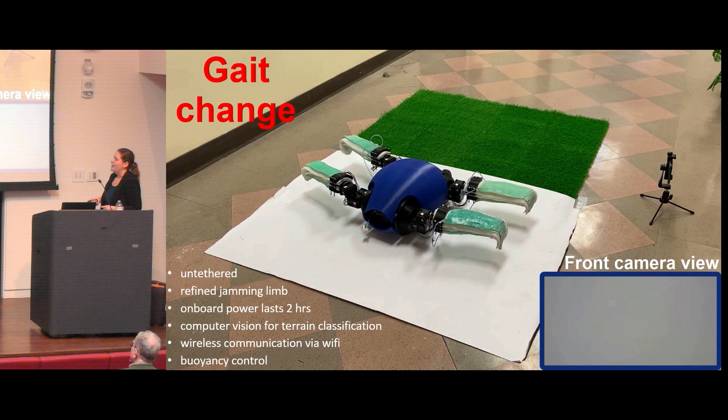And these are just some videos of the robot moving on different surfaces that I won't talk about in detail. I will say that the robot is now trotting instead of walking. So now we have 2 legs in contact with the ground versus 3. And so this is a much lowered cost of transport in terrestrial mode.

And this is the robot just doing a transition from crawling to standing, which is something that we found really challenging for a while. You've seen in a lot of videos, it's very easy for us to go from upright standing to crawling because we're just falling. But going from crawling to standing is quite a bit more challenging. So we programmed in this kind of downward dog yoga-inspired pose in order to stand the robot.

And this is something that we did. We were privileged to bring the robot to a conference in California last year where we didn't have water access. So we wanted to demonstrate the robot walking and then going into crawling and then showcasing flipper motions in air and then coming back up into walking. We didn't want to have to pick it back up and stand it back up every time. It seemed to kind of detract from the autonomous transitions that we were going for. So this was really helpful towards that goal.

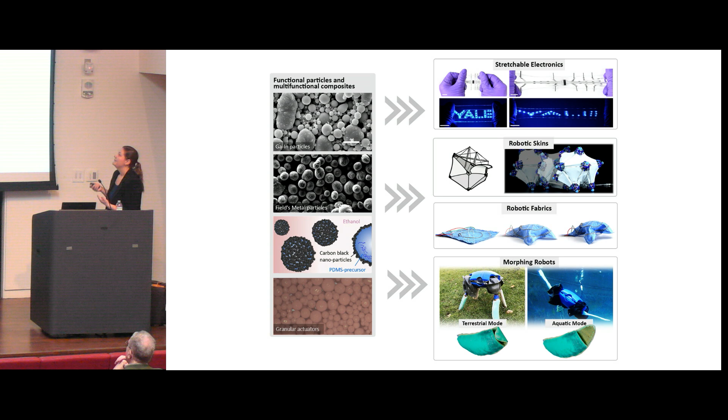Okay, so these are my last slides. Just kind of overview, I was able to tell you about a couple of our projects today, robotic skins and our amphibious robotic turtle. But of course, all of these use some of our materials that we've innovated for these purposes, our variable stiffness materials and our actuation materials. Lots of them are liquid metal based, and those come through a little bit more in some of these other topics.

And this is the overall vision that we're striving towards. I'm really excited about this idea of adaptive morphology, and we've kind of coined this term of adaptive morphogenesis. We recently published this paper in Nature Reviews Materials that has the same title as my talk today, Robots That Evolve on Demand.

And adaptive morphogenesis, we formally describe as unified structural and actuation systems that can adapt in their overall morphology toward changing tasks and environments. But it's been adopted by the community. Lots have kind of put this idea that it's evolution on demand. And of course, that is directly inspired by these untapped bio-inspired adaptation strategies of looking at evolution as an inspiration

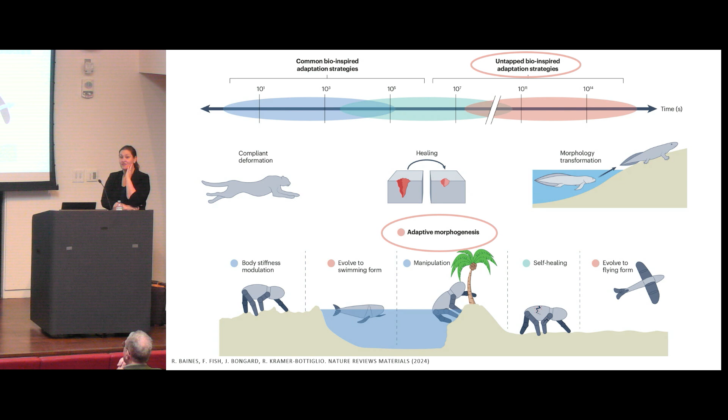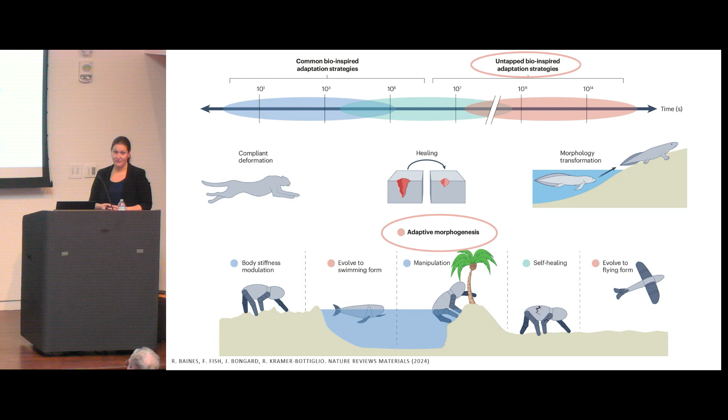for morphology changes. We can think about the terrestrialization of animals, how they went from water to land and how that happened over such long timescales, but that using emerging technologies and materials, we might be able to achieve those types of behaviors very energetically efficiently and on much, much shorter timescales, potentially outpacing the evolution of animals and potentially informing how animals could evolve and how we might help them evolve in the future and push them towards survival strategies in our rapidly changing world.